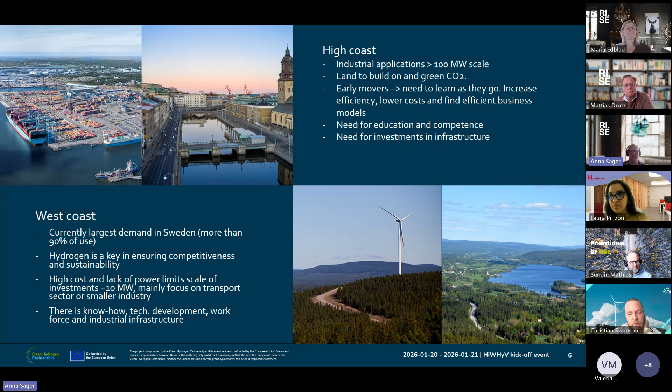This is just to show what partners we have in the project quickly. So we are 45 partners in the project. And now a bit more before the other 2 speakers come in also, how does hydrogen connect to the bioeconomy? In our project, we demonstrate how renewable hydrogen can connect energy, industry and the bioeconomy in one integrated regional system, both in the dual hydrogen valleys.

And it's mainly by replacing fossil-based hydrogen in applications such as ammonia and fertilizer production. The project supports climate neutral agriculture while strengthening energy resilience and industrial competitiveness. And what makes our project particular is it's taking the system perspective, as I already mentioned, with our transition arena, linking hydrogen production with industrial use, waste heat recovery, transport, e-fuels, and regional value chains. And in that sense, HiWHyV is not only about hydrogen production, but about building a more resilient future energy system for Europe.

And one of the strongest differentiators of our project is that it's not just an electrolyzer project. It actually integrates the production with industrial use, transport, e-fuels, energy balancing, and waste heat utilization and circular resource flows. We, for example, will test and demonstrate residual oxygen from electrolyzers in aquaculture to produce fish, and waste heat will be reused in district heating systems.

And I think back to you, Matthias. Will you hand over to the next speaker? I think we can continue then with Christian. Yes, absolutely. Thank you very much. Thanks for inviting us to speak here today. And looking forward to talk a little bit more about what we do at Lhyfe and how that integrates within the bioeconomy. And I will start sharing my presentation here. Just a second. Hopefully there we are. Nope, that's not correct. Sorry, my bad. That should be correct. Okay.

Yes. So, as I said, once again, thank you for inviting me here. My name is Christian Swanson. I'm a business and project developer at Lhyfe. We are a hydrogen producer. I will tell you a little bit more about that in just a second. My job is I'm responsible for 2 of our Swedish projects to take them to FID, both from a commercial but also technical point of view in terms of collaborations and partnerships, and how to integrate the hydrogen plant into a larger, let's call it, industrial symbiosis, because that's what is needed to get this type of projects.

I think 10 megawatt. Oh, sorry. Christian, sorry to interrupt. I think maybe you can repeat the last 2 minutes because it froze. Oh. I don't know if it's the internet connection. I think it froze again, or was it just me? Okay. Can you guys hear me better now? Yes. Oh, fantastic. Okay. We'll simply try again. Can you see my screen also with the presentation now? Yes, perfectly. Okay. Well, then good for me. I got a little rehearsal here. We'll start from the beginning.

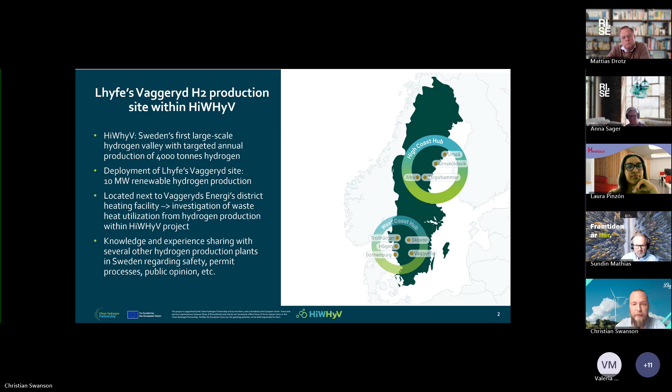To give you just a quick introduction to who we are at Lhyfe, we were founded in 2017. We're headquartered in Nantes in France. What we do is simply we design, install, and operate green hydrogen production plants. And then we make sure that the molecule is available both for the mobility and industry sector. We see ourselves as pioneers within this field.

We had what we would call the first renewable hydrogen plant in the world, and our definition of that is when it's directly connected to a source of renewable energy and producing only with those electrons. We also had the first offshore renewable hydrogen plant, a test pilot plant on the Atlantic coast outside of France, for a year.

We currently have 4 sites installed and another 50 megawatts under construction. We're active in 12 countries in Europe, but also in Canada. We are listed on the Euronext in Paris, so we're a publicly traded company, and we basically have, you could say, 2 ways to get to the market with our molecules.

It is the bulk model for smaller industrial needs, but also mainly for the heavy mobility with buses and trucks and/or trains. These projects are usually standardized project designs, 5 to 10 megawatts, where we deliver the hydrogen through bulk gas tube trailers. And then we also have the on-site larger projects where we are directly connected to an off-taker in industry. It could be ammonia, methanol, or a steel plant, for example. And these are usually bigger projects.

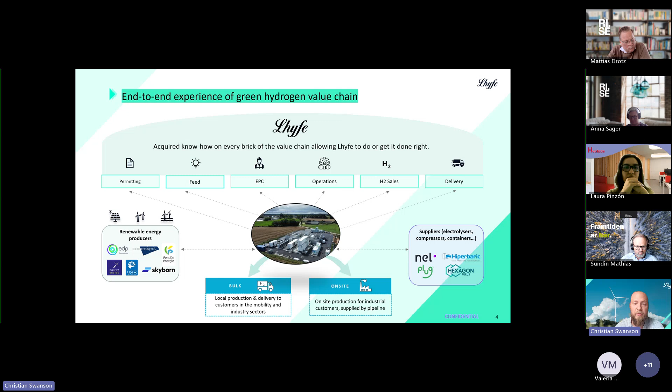We say that we follow more or less the whole value chain of the hydrogen. We do the development of our projects, we do the permitting, we do the financing, we do the engineering, and for our first batch of projects, we're also the ones that have fully built them. So we have been our own turnkey EPC, you could say. And then we keep ownership of the plants and follow through on operations and sales and delivery to the end user of hydrogen. But we do not produce our own energy, so we cooperate and partner with renewable energy producers, and we also don't own any hydrogen refueling stations.

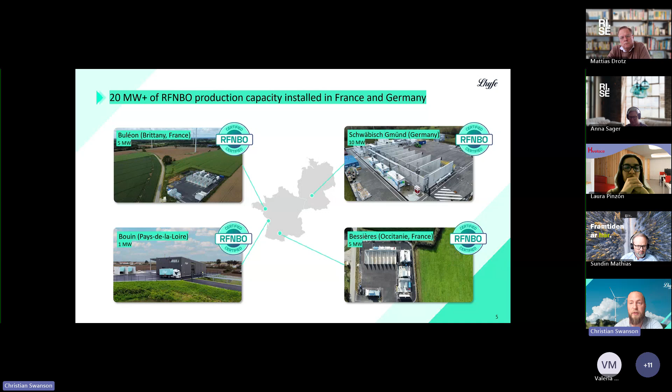These are our 4 plants that are in operation today. 3 of them are in France, and 1 is in Germany. And on top of that, as I said, we have another 50 megawatts under construction to soon be online in France. But we're also working on 2 projects in Sweden I will get into in just a second.

Most of you have most probably seen before the different use cases for hydrogen, may it be hydrogen-powered vehicles or existing and new industrial applications, either as a fuel or as a raw material in chemical processes. But when we talk about the bioeconomy, we of course integrate it with biogenic CO2, or it could also be nitrogen in the case of ammonia, to produce e-fuels. But I would like today to talk a little bit about other ways that we also integrate hydrogen into the bioeconomy, maybe at a smaller scale, when it comes to waste heat recovery mainly.

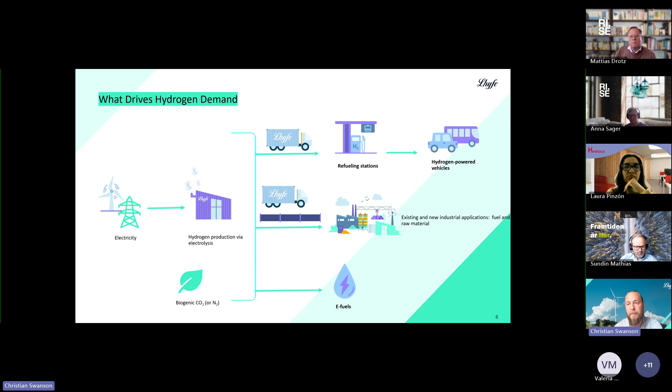So my entry point to this is that the hydrogen discussion is often dominated by these mega projects, large e-fuel facilities, export and global shipping projects on the gigawatt scale. These are of course extremely important for our energy transition. But I would like in this case to focus instead on the smaller scale projects that can already today decarbonize local industries and become a very important part of regional industrial symbiosis. It can support district heating, can be integrated into agriculture and with biogas, and in this way create regional resilience.

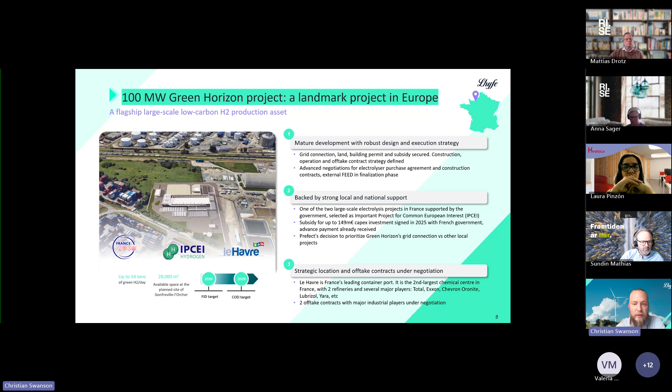But just so you don't think that I'm completely biased, just because I showed you a bunch of small hydrogen projects, we do also work with the big projects. So this is just to give an example of a 100 megawatt project that we hope to take FID on in France this year, in Le Havre. It is one of 2 large-scale electrolysis projects in France supported by the government, and it's selected as an IPCEI, important project of common European interest. So we do both, but today I would like to focus on our smaller projects in Sweden.

So they are called Vaggeryd, as we already talked about in Anna's presentation, but also we have another one in a small place called Jordberga, which is just outside of Trelleborg, which is in the very southern part of Sweden. It's, as I said, close to Trelleborg. It's a major transport hub with the biggest roll-on, roll-off harbor in Scandinavia, where approximately 10% of Swedish export and import passes through every year.

Also close to the Öresund Bridge connecting Sweden and Denmark, and also Helsingborg Harbor, where together even more Swedish import-export goes through. Vaggeryd is located near Jönköping, and it's basically halfway between the very southern tip of Sweden and Malmö and Stockholm. So there are a lot of logistical centers, and it's also easy access to Gothenburg as the second largest city.

What's, let's say, a common denominator for these 2 projects? It's that they have a strong local political support. Trelleborg has positioned itself as a front runner in green hydrogen, and they are actively supporting our establishment, both where we're building a plant, but also in other collaborations, and making sure that there is also offtake drive in the region, and working as a partner in this.

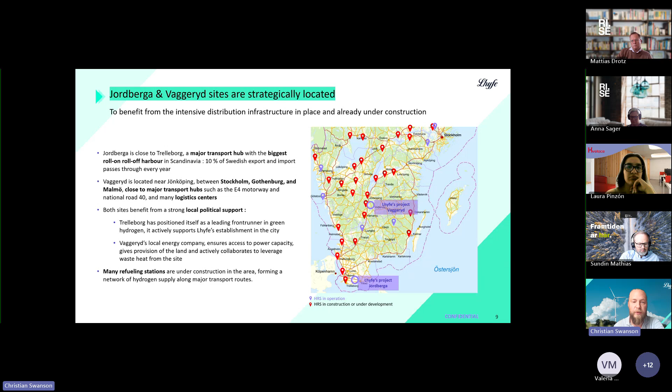This will have several advantages. It will reduce the biomass consumption, of course. The more heat we can provide, the less they need to burn. And also the overall system efficiency of using our resources as wisely as we can. But it will also give improved operational efficiency. For example, this district heating plant doesn't operate year-round. In summer, it can be fully taken care of by current and future waste heat.

And by adding the hydrogen waste heat into this, they can start their plant later in the fall, and they can close it earlier in the spring. So not only do they save on the biomass, but also in operational and asset management of this plant. And naturally, for the hydrogen plant, new value streams open up in terms of sale of waste heat. And we also need to cool our plant less with air coolers, so we reduce our operational costs. So for everyone involved, this is a win-win situation.

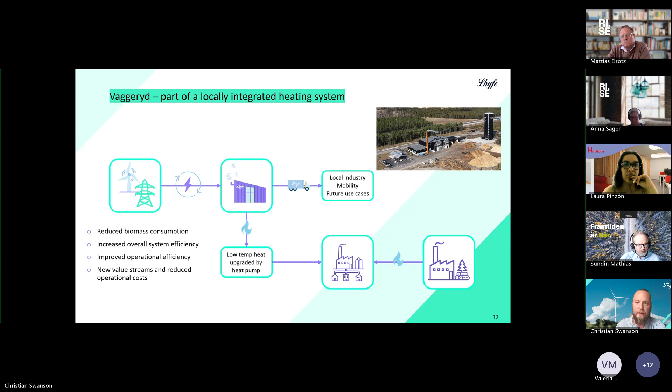We produce some process water, wastewater, that we're looking into using as irrigation for the surrounding farmland. There is local wind power. There will be local solar power and battery storage. So having a behind-the-meter solution where we only use locally produced energy as a hybrid park for our plant.

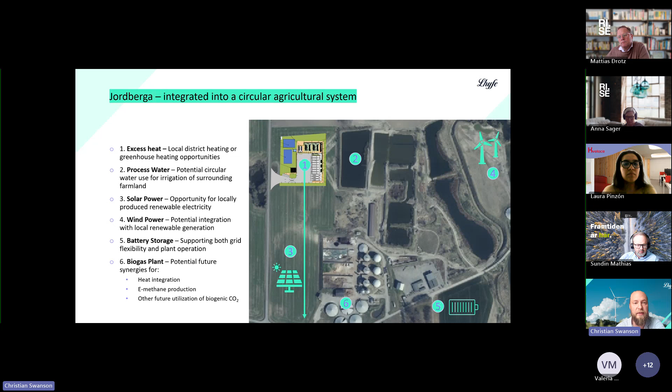And also with the biogas plant, as we said, we have the heat integration, but also one could see a future where we deliver hydrogen to the biogas plant to combine with their biogenic CO2 to produce even more methane, which will then be an e-methane molecule that can be distributed through the natural gas grid. So we are trying to work together with all of the local stakeholders here to create a circular agricultural system.

I mean, just to finalize the thought process here, and I think perhaps this is the most important takeaway from these examples, that the future energy system will likely not be built through isolated solutions, but through integration between the sectors. And hydrogen has the potential to act as a connecting link between renewable electricity, industry, agriculture, district heating, and the broader bioeconomy in general.

And so when these systems become more integrated, we also create resilience against fossil fuel dependence, resilience against energy price volatility, and resilience through stronger regional and local value chains. So ultimately, hydrogen is not only a decarbonization tool, it can also become an integration and resilience tool. That would be my takeaway from this.

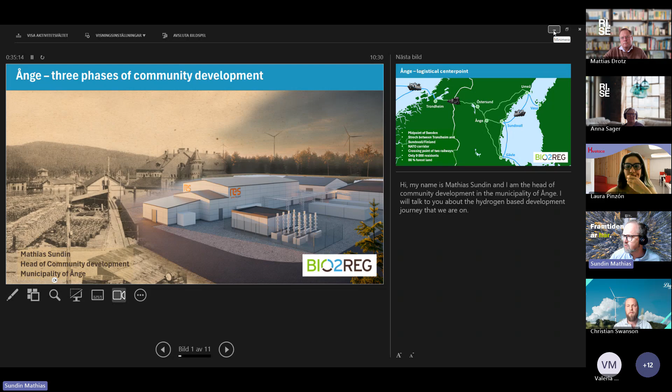So thank you very much for having me here at this webinar. My name is Mathias Sundin, and I'm the head of community development in the municipality of Ånge. I will talk a little bit about how that impacts on our daily business in our small community. And I will talk about 3 phases of community development.

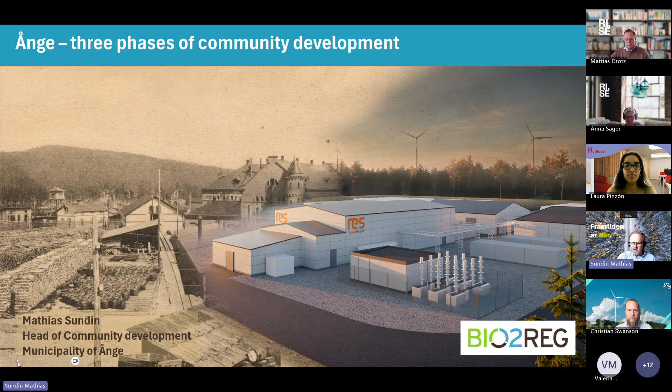The municipality of Ånge lies between Trondheim and Sundsvall in a stretch called Mittstråket, which is also a NATO corridor. The midpoint of Sweden lies within our municipality, so we have equally far up to the north as down to the south. We are a small municipality with about 9,000 residents, and we have Sundsvall and Östersund as our nearest towns, some 90 to 100 kilometers in each direction.

We also have two major railways that cross each other in Ånge, Mittbanan and Stambanan. And we have one of the biggest railway terminals in Sweden there. We are dependent on the forest. It constitutes about 88% of our land in our municipality, so we have a lot of forests.

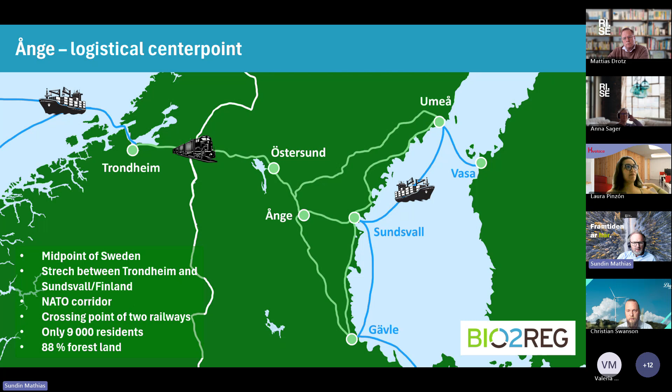As I said, we have had 3 phases of development in our municipality. The first phase began in the late 19th century when the railways were built from each direction and crossed in Ånge. That gave us some logistic facts to develop our community.

In the beginning of the 20th century, there were also hydropower plants built, and this led to energy-intensive industries being started in Alby and Ljungaverk, in electrochemical, energy-demanding industries. And in these times, the companies built the whole societies. They built schools and housing and shops, and residents in Ånge went from 5,000 people up to 17,000 people in the middle of the 20th century. And the whole society was flourishing during this part of the time.

Then phase 2 began somewhere in the 1970s, and it has continued until just recently. During this time, the forestry was mechanized, the industry was automated, it was also moved to other locations due to globalization. Our youth moved due to lack of jobs and a desire for urbanization. And the number of residents decreased from 17,000 down to where we are now at 9,000. Schools were shut down, houses were demolished, and actually some of the people working here had a motto that was to die with dignity. And that is, of course, not so positive.

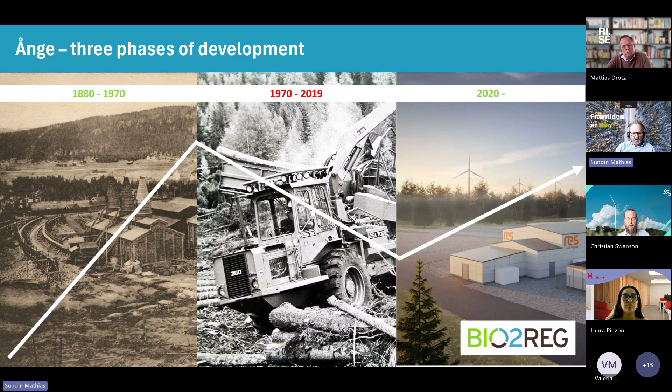The third phase of development started in 2019 when Norra Skog decided to close down a big sawmill in Östavall, which is also in our municipality, leaving about 120 people without a job. The municipality then formed a crisis group together with the business society and started a cooperation that was very successful. Within about a year, almost everyone who lost their jobs at the sawmill had gotten new jobs.

And as there was a positive momentum, the work was decided to be continued, but now with a focus on the future. And at this time, there were several companies with plans to expand the wind energy production in the region. And together with those, we decided on 3 cornerstones for our future work.

And those 3 cornerstones were to attract investments that led to development of local values, primarily new jobs. Instead of producing energy that just gets sent somewhere else, we wanted to produce something from it in our municipality.

And the second was to attract new green industry that was going to form itself as cluster symbiosis to use all the waste streams and so on from different processes. And the third was that the focus was going to be on transforming electricity into hydrogen gas and further on to end user products.

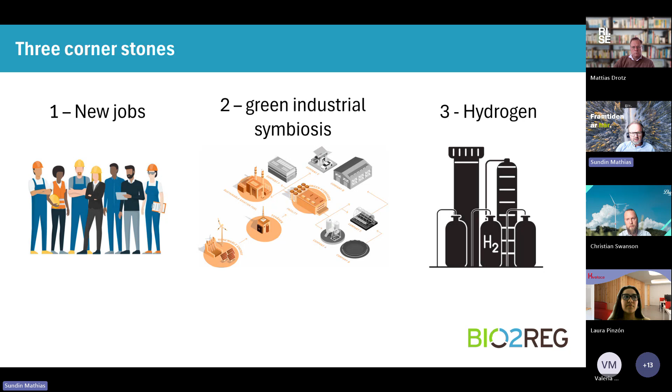And this is what we've been working with for the last 5-6 years, and we have come quite a good way. We are actually working with a great deal of the hydrogen value chain today. We are continuously working with increasing the energy production and the grid that is needed for distributing the power.

We have a couple of hydrogen industrial sites being planned, and on those we have a variety of different industries, greenhouses, fish farms, biochar, and the end use products that are going to be produced here is aviation fuel and green fertilizers. And we are also looking into the transport and logistics area, since, as Anna said in the beginning, we don't have that much of the end market here in our region, so it needs to be transported somewhere else.

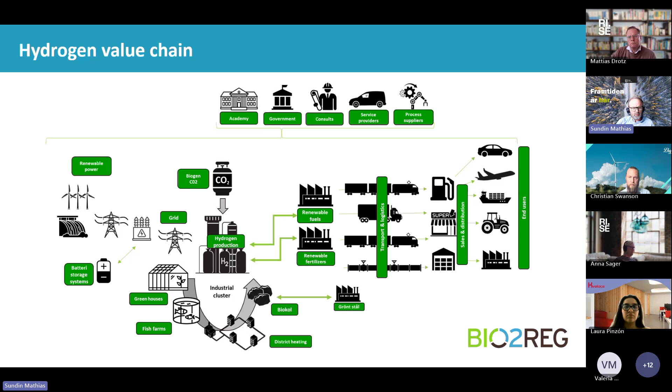We have our industrial site in Alby, which is the site that the municipality itself developed, and there we will have the aviation fuel production, but we will also have a fish farm, a couple of greenhouses, and a biochar factory. And this site is actually being prepared right now, and the first factory will start to be built next year, and the whole site is planned to be fully operational in about 2030.

And we have some additional wind farms. We have a new logistic hub. We have a correctional institution and some other projects as well. So for a small municipality, we have a great deal of things that we are working with right now.

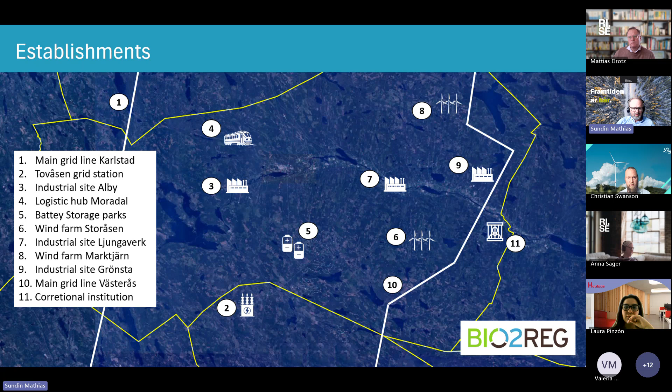Why is Ånge successful right now in this work? I would say that one of the things is that our politicians have dared to say yes to additional power production. Today we have about 140 wind turbines and another 60 being built. And if you look just outside our municipal border, we have approximately another 100 wind turbines.

So when the new wind turbines have been built, we will have a maximum effect from the wind farms of 1,250 megawatts. We also have 13 hydropower stations with an effect of about 400 megawatts. In addition, there are 2 large battery storage systems that have been built. We also have a large solar energy park that is in pre-planning. So altogether, this is one of the foundations for the industries that are looking for great places to establish themselves.

And I would say another reason why we have succeeded so far is that we all the time search for cooperation, because we're a small municipality with an even smaller organization, so we can't do everything ourselves. So we have tried to join with the business society, with academia, with regional and national government, and we have done some different things. We have an economic association which we work together within.